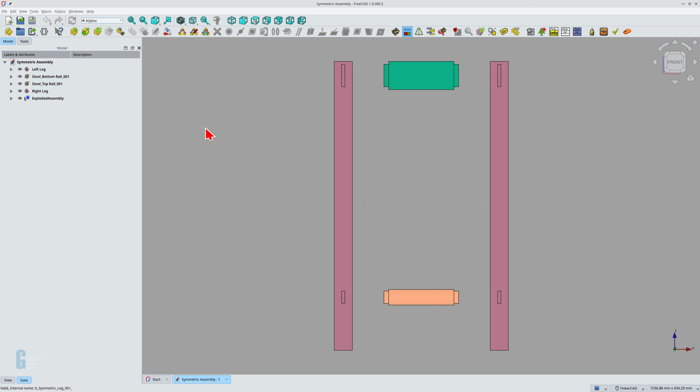I make furniture for fun, and I have found that table or chair legs might not be symmetrical in all orientations of the leg. This means that I have to create a new part in the assembly and then assemble it with the other parts. Let's look at a simple leg design that does not need modification to be assembled. The example on the screen shows a section of the stool where the leg design is symmetrical. There are two legs and rails are used to join them together.

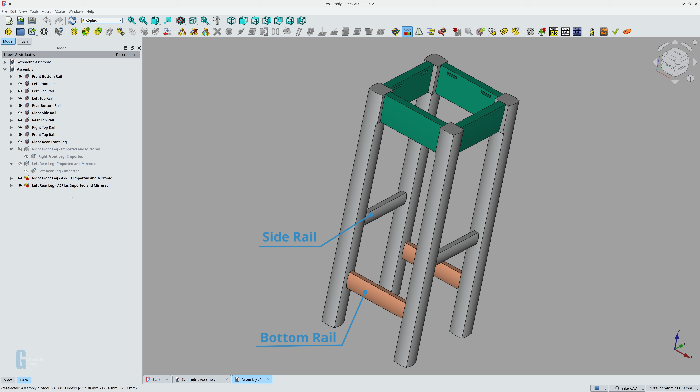I'm sure you can see that I simply imported the leg twice, then rotated one leg to align the mortises properly for assembly. I was able to do this because the mortises for the leg joinery were in the same place on two sides of the leg. Now let's look at an example where we have to create a part to assemble the stool correctly. Notice how the front and back rails are lower than the side rails? The leg is designed for this, but the stool cannot be assembled without creating additional parts in the assembly.

In order to assemble the stool, I need to make 3 copies of the leg, 2 of which are a mirror of the first leg and the third is rotated 90 degrees. In my workshop, I would select the inside faces of each leg and carefully lay out the mortises so they are aligned properly. In the digital world, I should be able to use FreeCAD to do this for me. So rather than create 4 different leg designs, I can use the part workbench to mirror the legs. The mirrored parts are created as non-A2+ parts in the assembly.

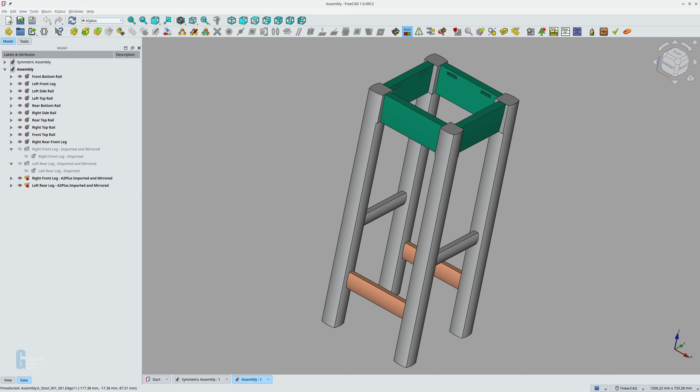I have created an assembly and imported enough parts to complete the front side of the stool. I have also assembled the left front leg to the top and bottom rails. You can see that the mortise on the front right leg for the bottom rail is visible, which means that the leg needs to be rotated 90 degrees so that it aligns with the bottom rail. But I can see that the mortises for the right top rail and right side rail are facing the wrong way, so that's not going to work.

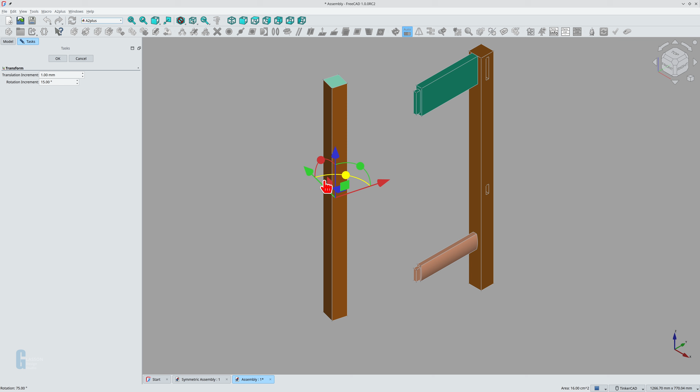The solution is to mirror the right leg using the part workbench before continuing with the assembly. I'll undo the transformation first. Now I'm going to create a mirror of the right front leg around the XZ plane using the part workbench. Switch to the part workbench. Select the right leg in the model view, then select the mirror tool. Change the mirror plane to XZ and click OK.

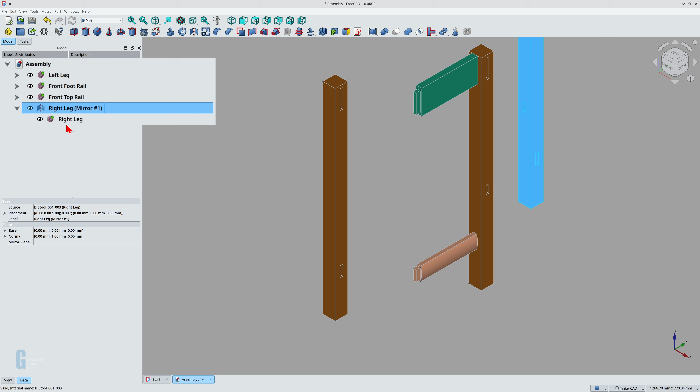The mirrored part is graphically indistinguishable from any other part, but it has been created as a non-A2+ part in the assembly. The model view shows that the part workbench has created a mirrored copy of the right leg with the original as its child. Clues to identifying non-A2+ parts can be found in the model view. Notice how each part in the model view has an icon next to it. The icon that looks like a box with a green down arrow indicates that the part has been imported as an A2+ part.

The icon that looks like the Part workbench's mirror tool indicates that the part is not an A2+ part. But if you're in any doubt, click on the part and then switch to the Data tab in the Property view. A2+ parts have a section called Import Part that contains the A2+ workbench version number and an object type of A2P part, amongst other things. The mirrored part contains none of that information.

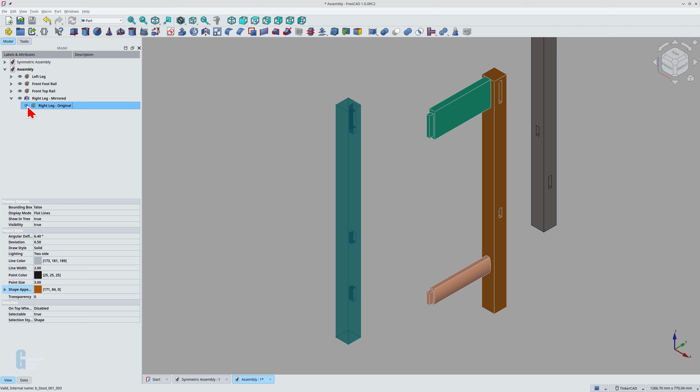I like to rename parts to make it easier for me to identify them. I find that this becomes more important if you make a number of changes to a part within the assembly because you could easily get confused. I'm also going to rotate the part to make the assembly a bit easier because I find that A2+ sometimes creates a mathematically correct assembly, but not one that is visually correct in cases where the constrained parts need to be rotated 90 degrees or more.

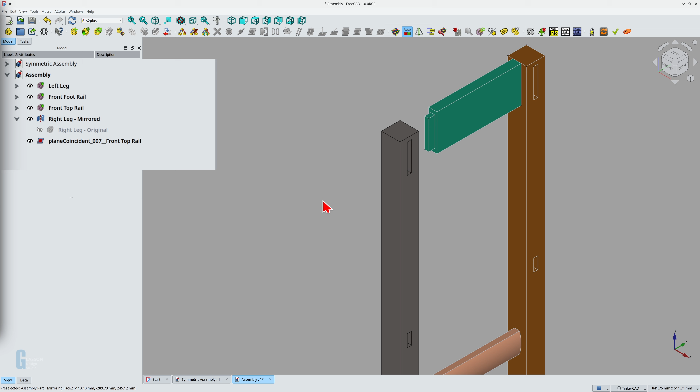Now I will begin to constrain the mirrored right leg to the front rail. Notice how the new constraint is at the same level in the model tree as the right leg itself. This tells me that the constraint is not attached to the leg as I had intended. More unattached constraints are added to the model as I finish constraining the leg. Unattached constraints would cause previous versions of A2+ to report an error and the constraints would often fail.

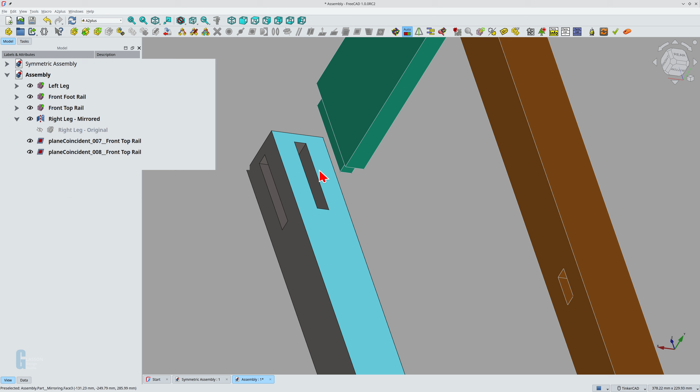In my mind, the unattached constraints mean that I haven't done the job correctly and that there may be a flaw in my assembly. I prefer to fix this because I think it makes for a cleaner assembly overall, but you could leave them there if you wish. Now I'm going to show you how to make the mirrored part into an A2+ part to help clean up your assembly. I have removed the unattached constraints for clarity.

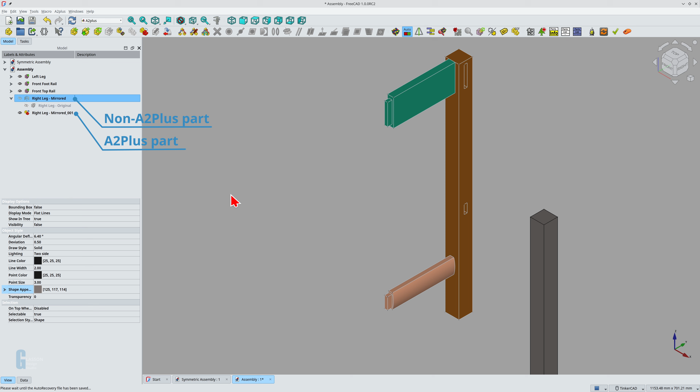I'll select the mirrored right leg, then use the Convert to A2+ Part tool to do this. This tool hides the original part, then creates an A2+ version in exactly the same location. Again, I like to rename the part for clarity. You can see that the rotational transform I applied to the mirrored leg has not been applied to the A2+ version. I'm not going to rotate the right leg again because it is mostly aligned correctly and A2+ should get the rotation correct.

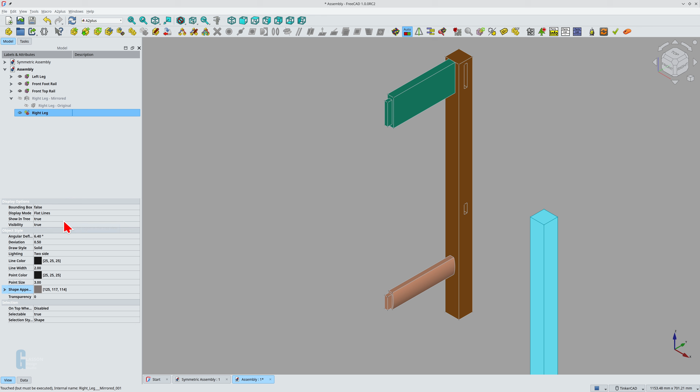I will now constrain the top rail to the new mirrored right leg. Notice how the constraint has been added as a child of the right leg. This means that the constraint is attached to the leg. I'll finish constraining the parts and you will see that these constraints are also added as children of the leg. I might be being pedantic, but to me the assembly is now complete and correct because all the constraints are associated with A2+ parts. I think that it is good practice to convert all non-A2+ parts.

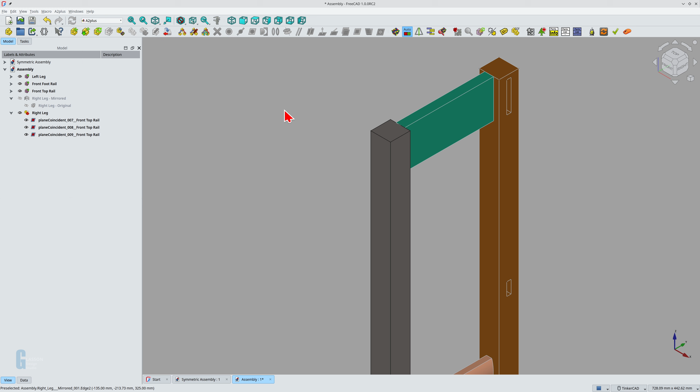The topological naming problem can raise its head when the parts are updated in versions of FreeCAD prior to 1.0. If your constraints break during the update, then it's a pretty safe bet that the topological naming problem has affected your parts. You may have to revisit those changes to work around the problem. Check out the video linked above if you'd like to learn more about the topological naming problem.